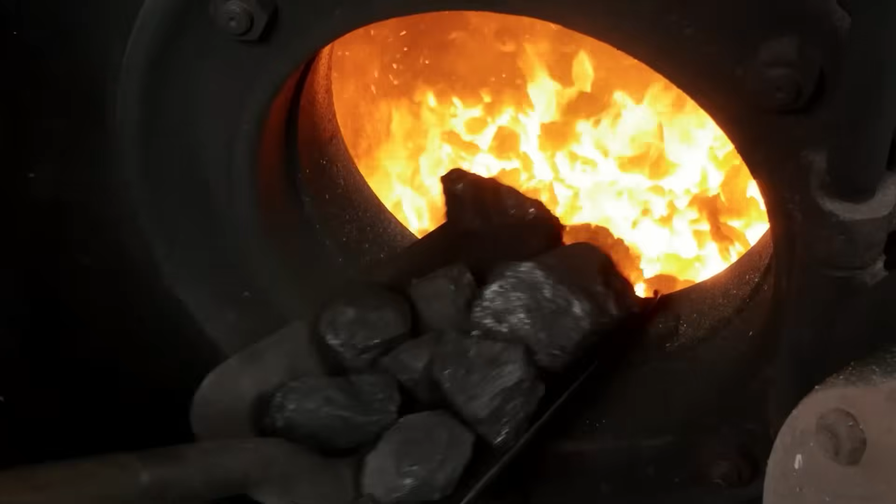Coal. The fuel that built the modern world, and the fuel that's been slowly choking it ever since. Dirty, carbon-soaked, supposedly on its way out.

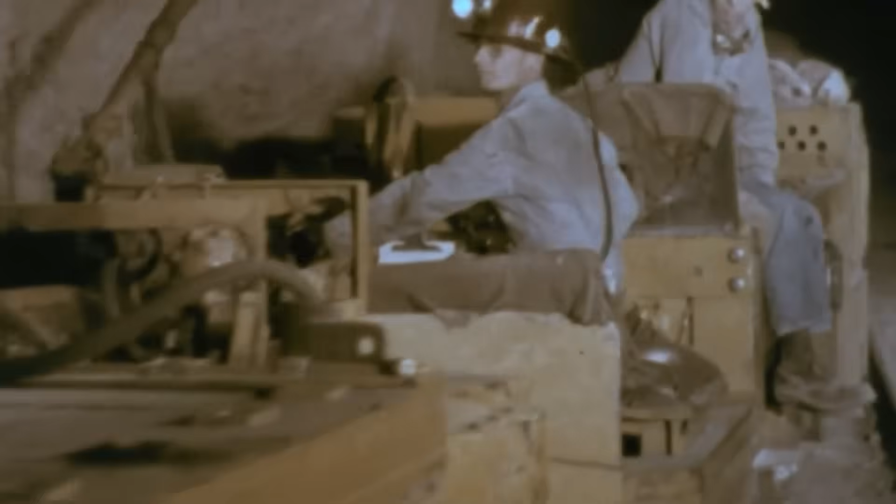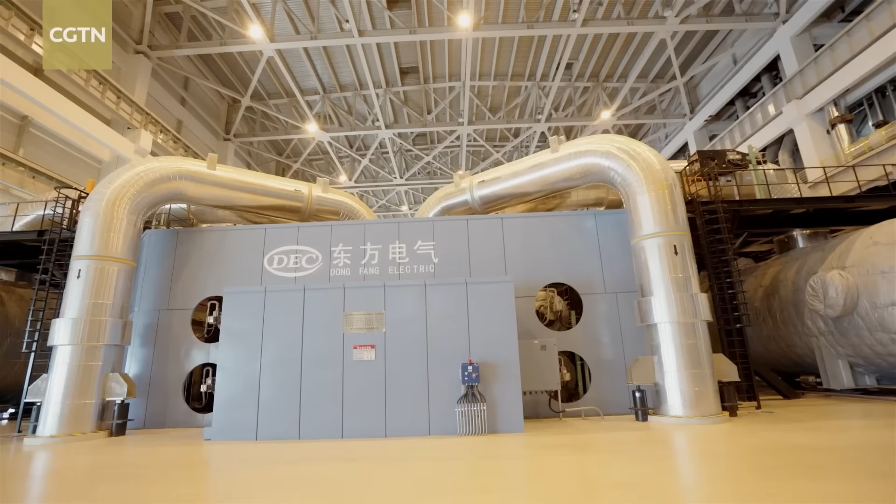So will someone please explain to me why Chinese scientists just figured out how to turn it directly into electricity, without burning a single gram of it? No fire, no smoke, no steam turbine, no combustion of any kind. Just coal going in and electricity coming out, with the only byproduct being a stream of pure CO2 so concentrated it can be captured, converted, and stored before it ever sees the atmosphere.

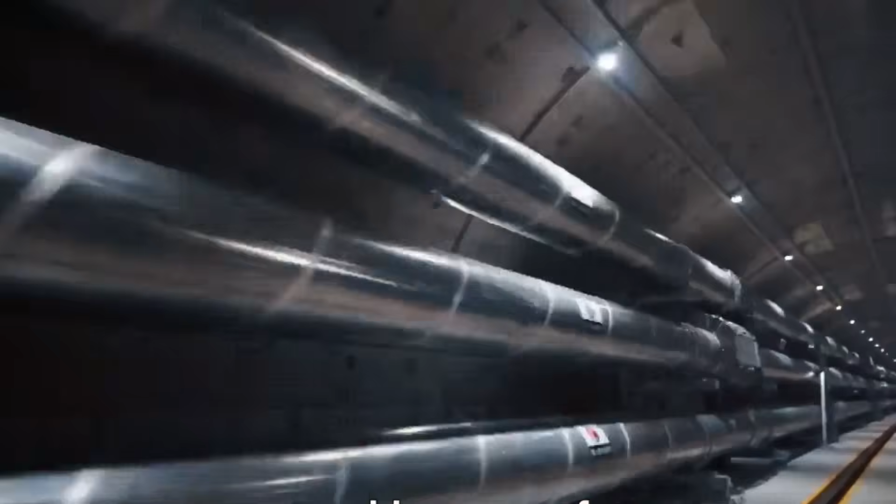The internet found this story in early May 2026 and completely lost its mind. Posts spreading in a dozen languages within 72 hours. And honestly, for once, the reaction made complete sense. Because if this works at scale, it does not just change how China powers itself. It changes the math on coal for every country on Earth that still depends on it. And right now, that is most of them.

China's energy paradox. Here is what people do not understand about China's energy situation. In 2025 alone, China built 78 gigawatts of new coal power capacity. To put that number in context, that is more than the entire electricity generating capacity of the United Kingdom, added in a single calendar year.

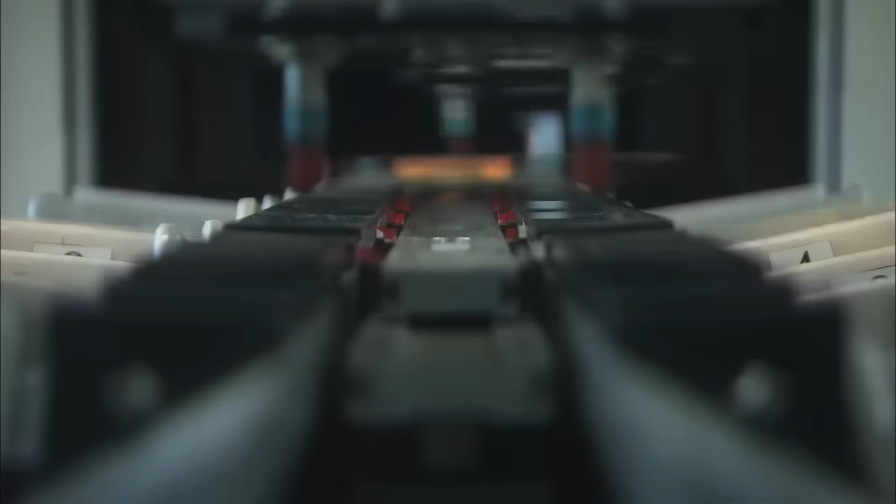At the same time, China is the world's largest builder of solar panels, wind turbines, and battery storage. Both things are true simultaneously. And that is not a contradiction. That is a survival strategy for a country of 1.4 billion people that cannot afford blackouts.

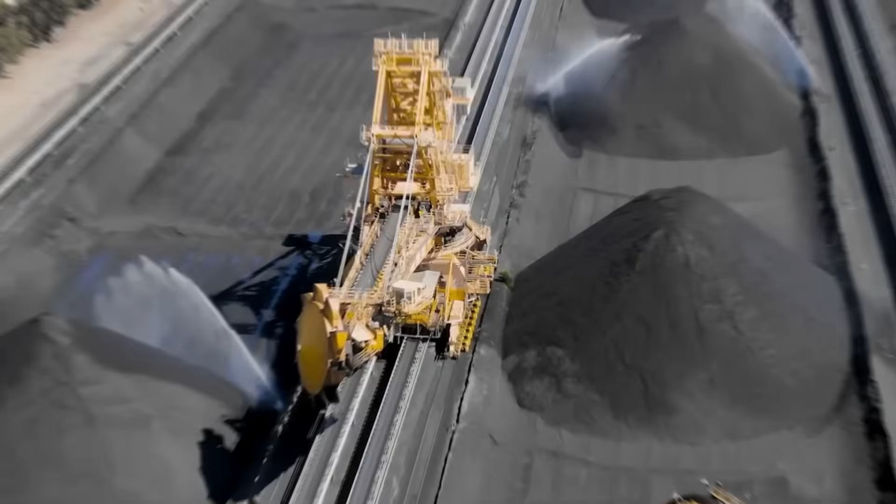But there is a problem hiding underneath the surface of all of that coal. China's shallow coal reserves, the cheap, accessible deposits near the surface, are running out. What is left is buried more than a kilometer underground, expensive to mine, dangerous to extract, increasingly uneconomical to ship across a country that size.

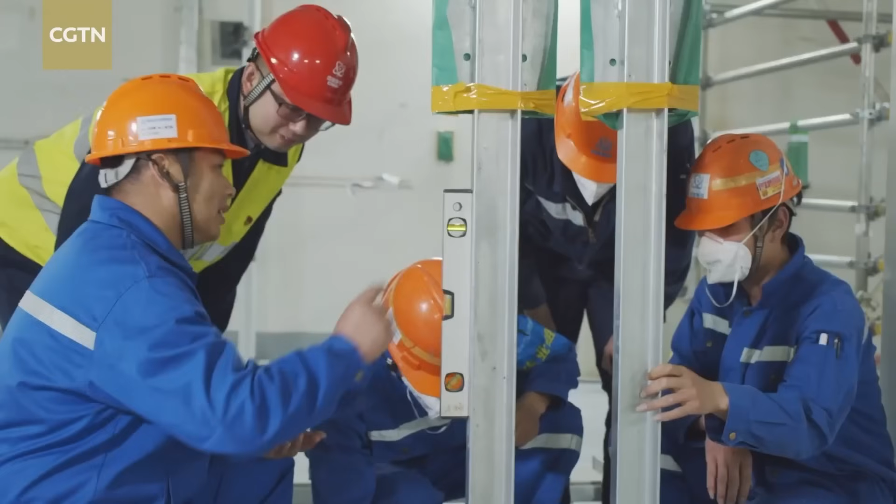So the question Chinese researchers started asking was not, how do we burn coal more cleanly? That question had been asked for decades and produced nothing worth talking about. The question they started asking was entirely different: what if burning coal was the wrong approach from the beginning?

Enter Xie Heping, academician at the Chinese Academy of Engineering, professor at Shenzhen University, and the man who decided the fundamental problem with coal was not the coal itself. It was what we had always done with it. But to understand why his team's answer is so significant, you first need to understand the wall every power plant on Earth has been running into for 200 years.

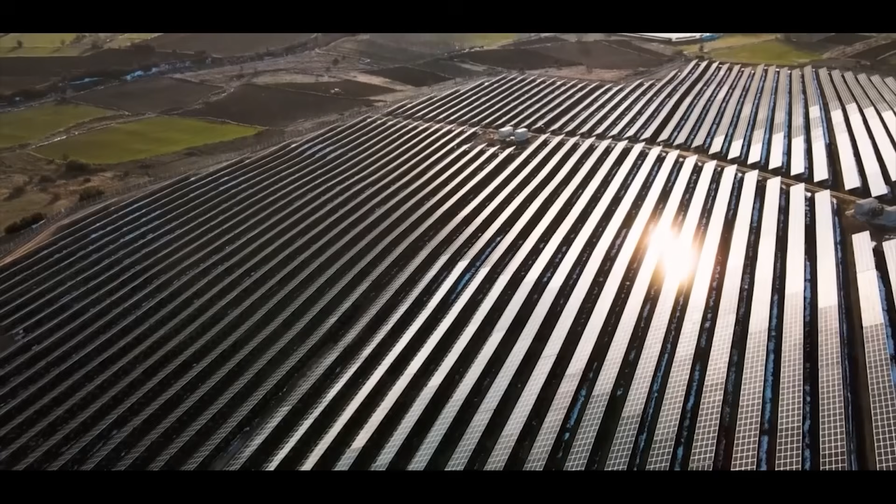So what if instead of burning coal, you just wired it directly to the grid? No fire, no steam, no turbines. And that's exactly what his team built. How the coal battery works.

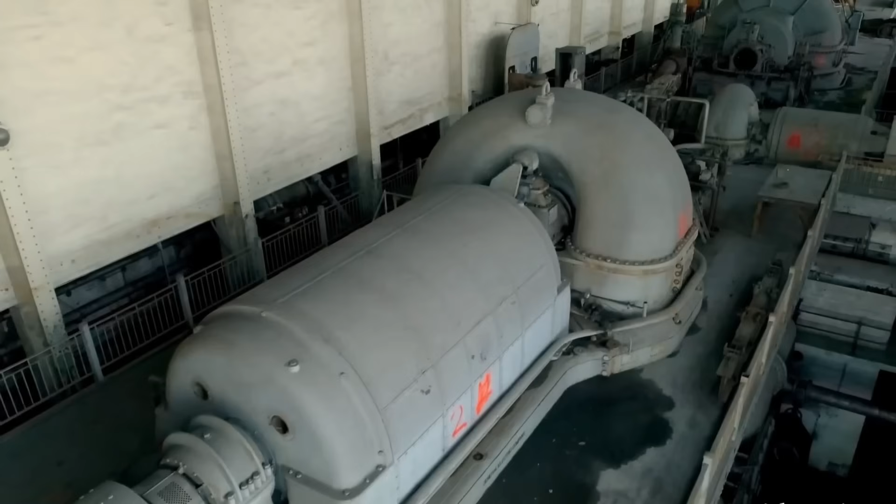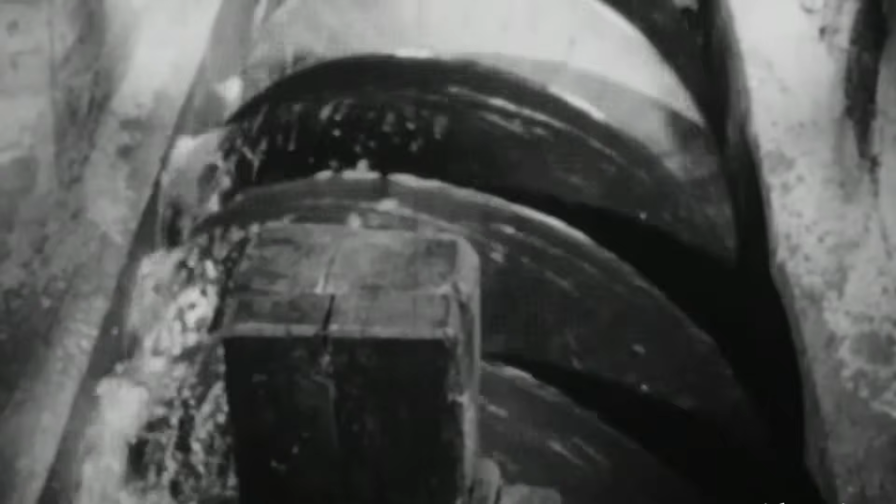Every power plant you have ever seen works the same basic way. You burn something. The heat from that combustion creates steam. The steam spins a turbine. The turbine generates electricity. Simple in principle, catastrophically wasteful in practice.

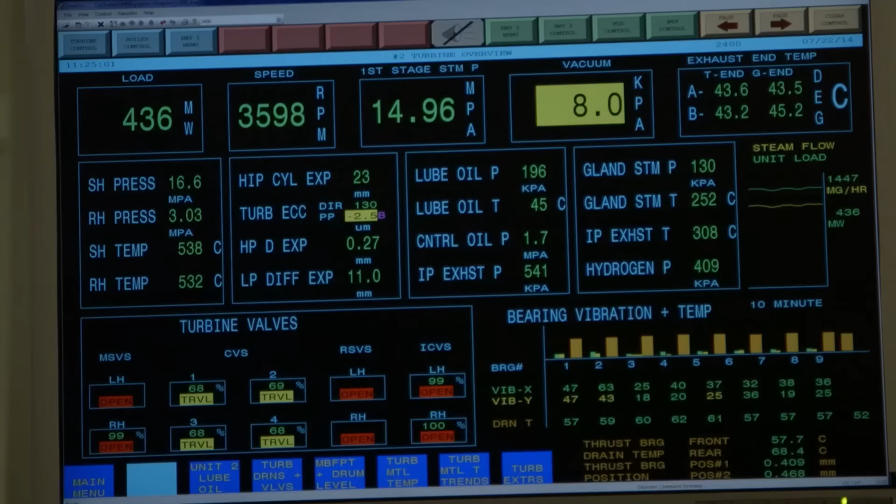Here is the problem. Every single step in that chain loses energy. By the time electricity actually reaches your wall socket, you have already thrown away more than half the energy that was locked inside the original fuel. That is not a design flaw that engineers failed to solve. It is a fundamental law of physics called the Carnot limit.

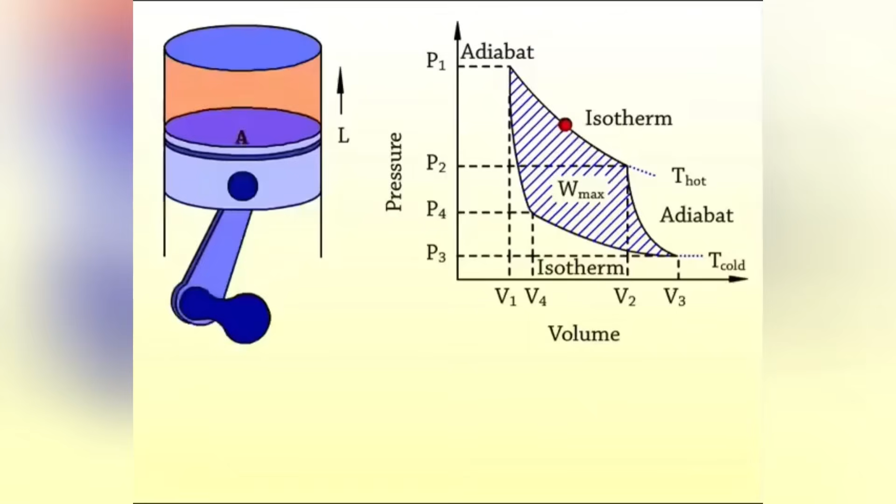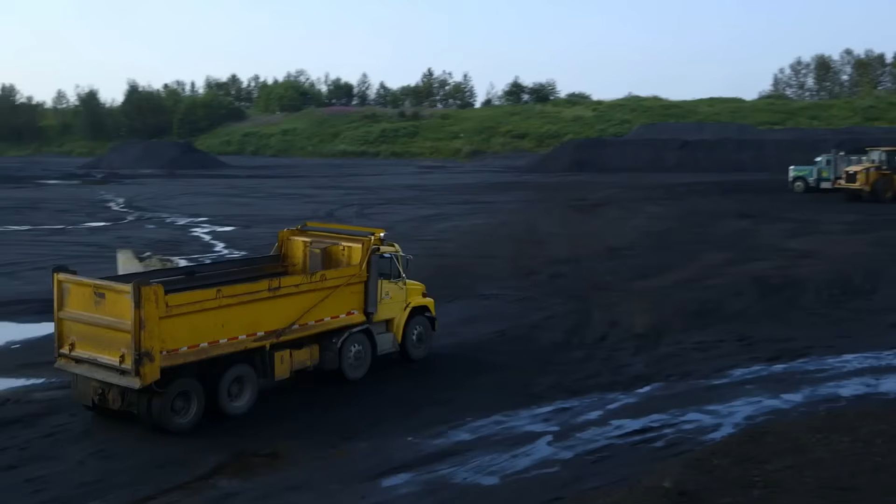The Carnot limit says this: any engine that converts heat into mechanical motion is mathematically capped by thermodynamics. The best coal plants ever built hit around 45% efficiency. The other 55% just disappears as heat, forever, no matter how clever the engineering gets. You cannot engineer your way out of a law of physics.

Xie Heping's team did not try to beat the Carnot limit. They removed it from the equation entirely. The technology they built is called the Zero Carbon Emission Direct Coal Fuel Cell, the ZCDCFC. Think of it as a battery where coal is the fuel. And once you understand how it actually works, the efficiency numbers stop seeming impossible and start seeming inevitable.

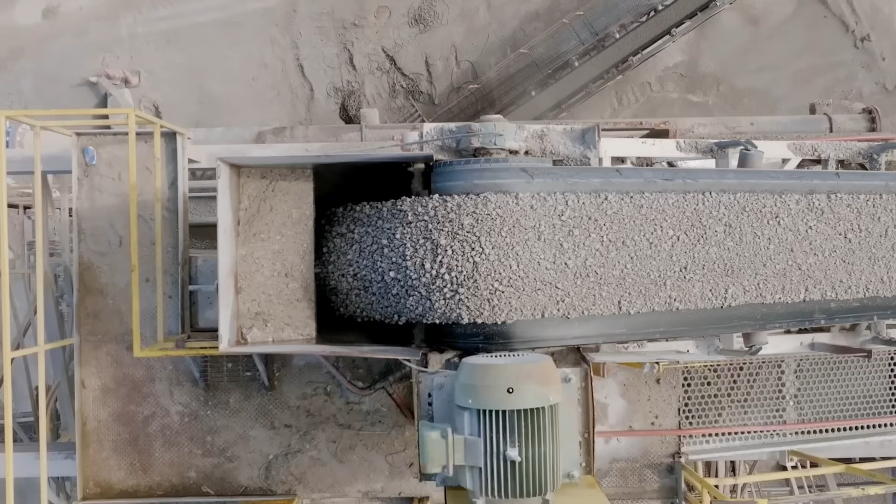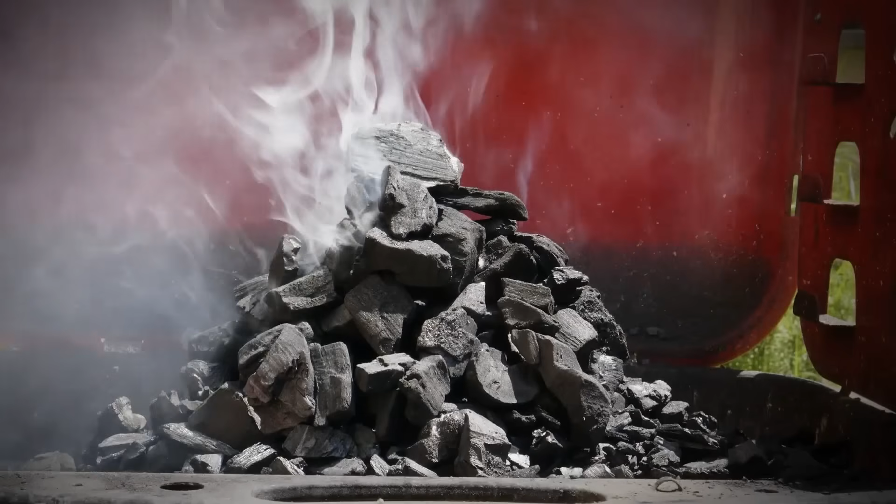First, the coal gets pulverized into an ultrafine powder, particles smaller than 10 micrometers, thinner than a human hair. Then it gets dried and chemically cleaned to remove sulfur and ash. This matters because what happens next is extremely sensitive chemistry.

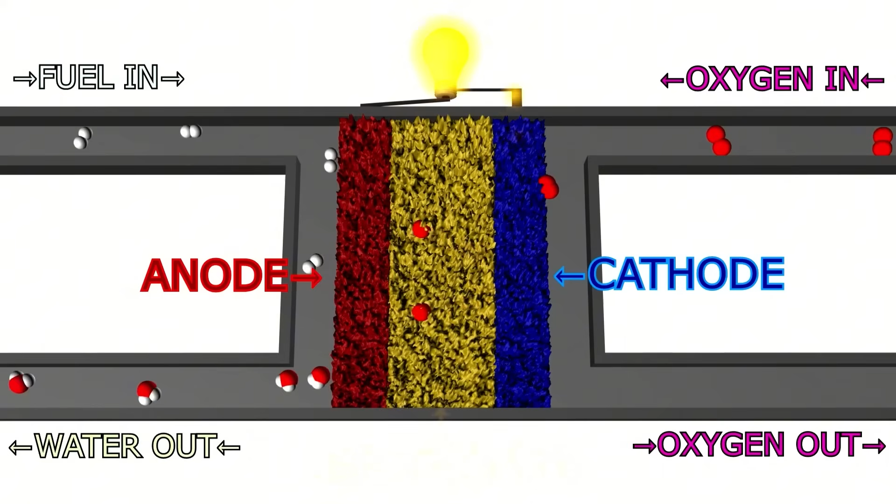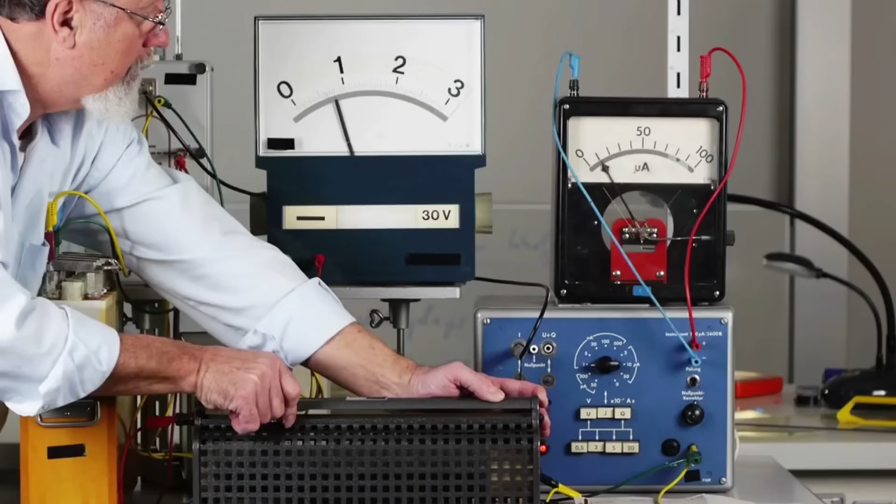That purified coal powder gets fed into the anode chamber of a fuel cell. On the other side is the cathode, where oxygen enters. Separating them is a ceramic membrane that conducts oxygen ions at high temperature. At somewhere between 600 and 900 degrees Celsius, the oxygen ions migrate through that membrane toward the carbon. And here is where the physics takes a completely different turn than every power plant ever built. When the oxygen ions meet the carbon atoms, there is no combustion, no fire, no heat burst.

Instead, you get a direct electrochemical reaction. Carbon and oxygen combine, and the energy that releases does not escape as heat into the atmosphere. It flows out as electrons, as electricity, directly, without any intermediate step.

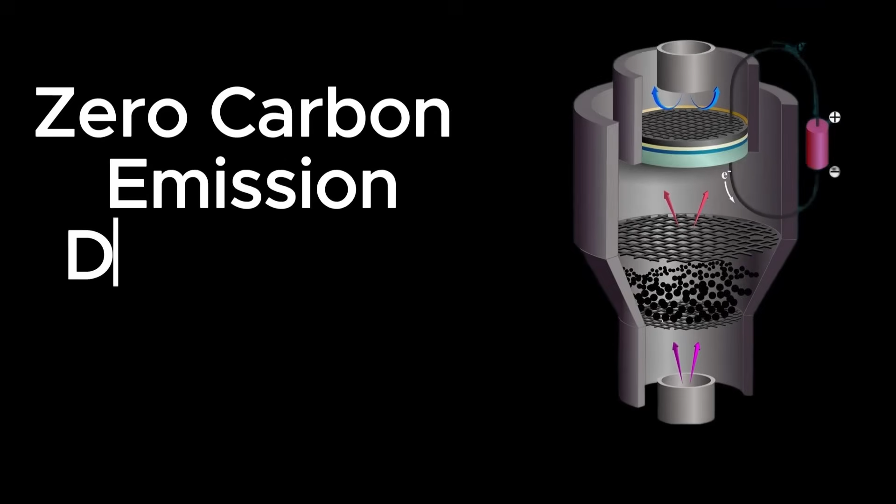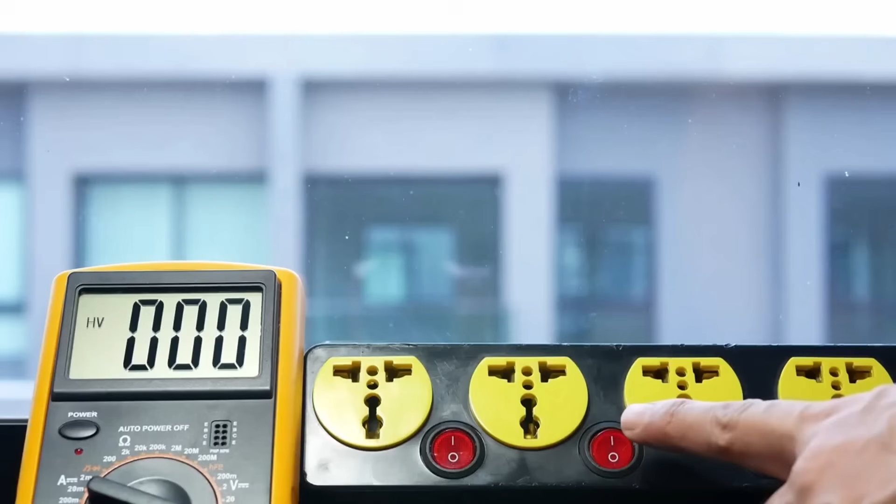Traditional coal plants run at 33 to 45% efficiency. The ZCD-CFC theoretical ceiling is 90%. Real-world practical efficiency demonstrated in the lab is 55 to 60%, even accounting for all the energy spent grinding, drying, and maintaining operating temperature.

It is still the most efficient coal power technology ever demonstrated anywhere. But efficiency is only half of this story. The half that actually broke the internet is what happens to the carbon. Because there is no smokestack, there is just a pipe, with pure CO2 coming out of it. And the team already figured out 3 different things to do with that too.

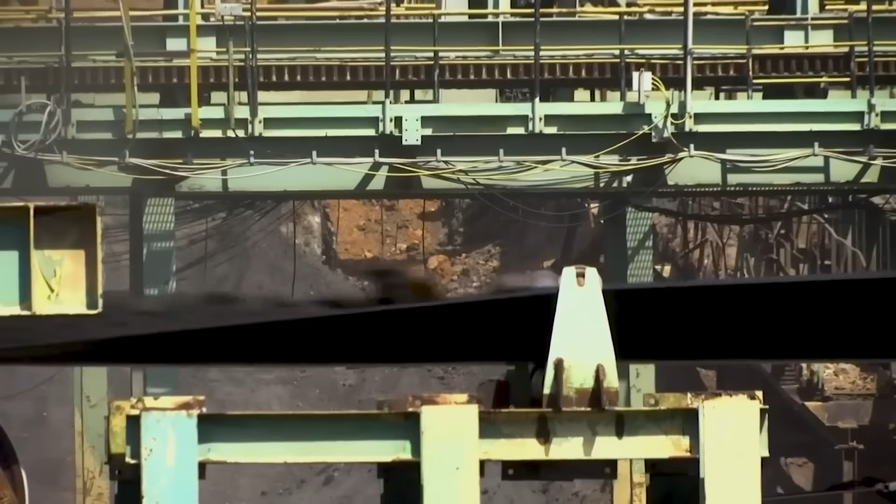The zero carbon claim and the underground power plant. In a normal coal plant, the CO2 that comes out is mixed with nitrogen, steam, sulfur dioxide, and particulates. It is a mess. Separating usable CO2 from that mixture costs between $50 and $100 per ton.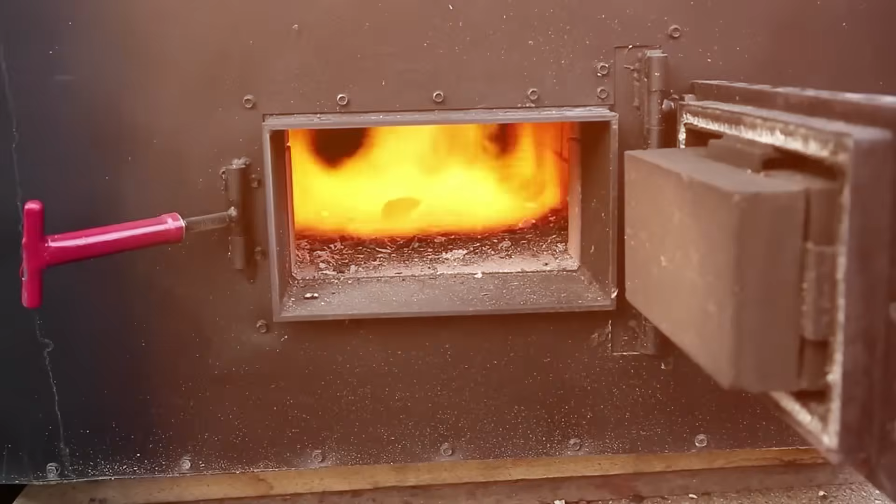Convert the CO2 to syngas through a process called dry reforming. Syngas is a building block for synthetic fuels, plastics, and fertilizers. Your waste carbon becomes an industrial feedstock.

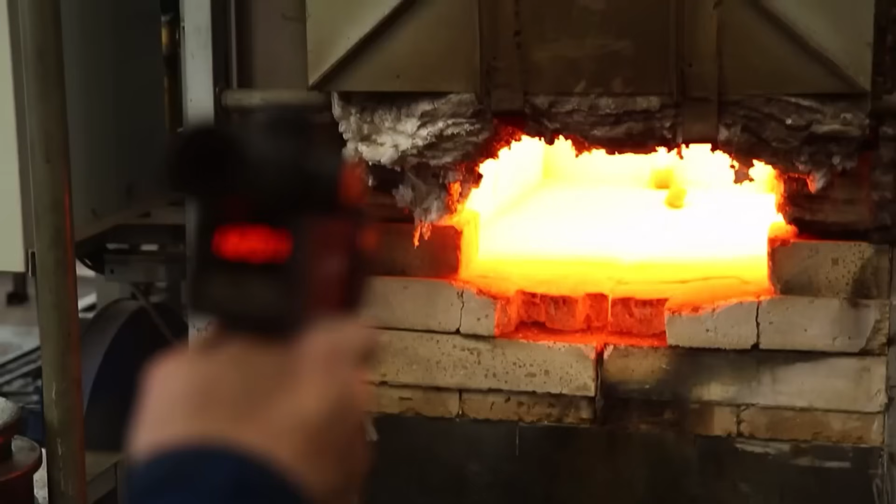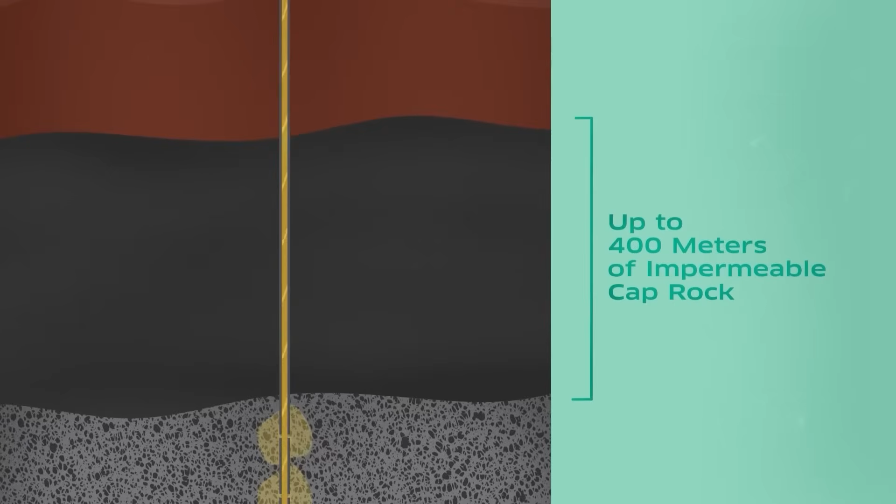Mineralize it. React it with mineral compounds to form solid sodium bicarbonate, chemically locked into a stable solid permanently. Inject it back underground into depleted coal seams, where it enhances recovery of natural gas, while keeping the carbon stored below the surface. In simple terms, the carbon becomes manageable because it was never allowed to mix with open air in the first place. In all 3 cases, the carbon never reaches the atmosphere.

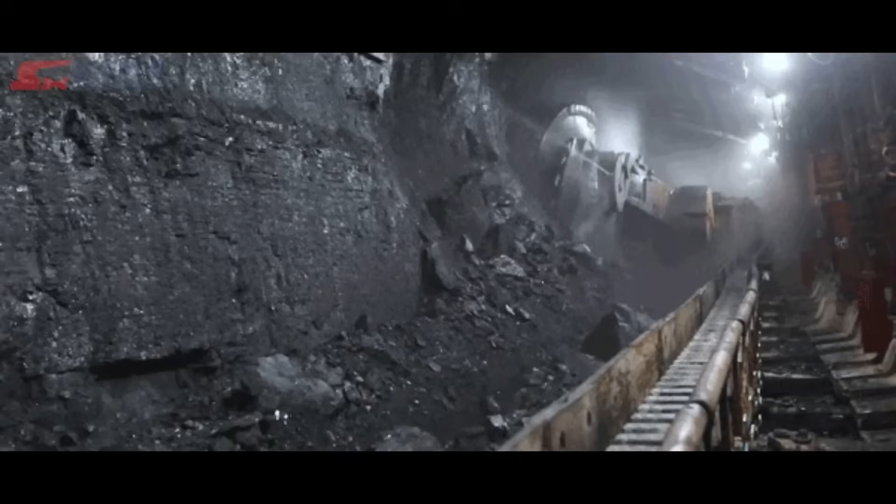That is not a marketing claim. That is a closed loop built into the chemistry of the device itself. Now, here is the part that goes from impressive science to genuinely reality bending. The team's most ambitious proposal is not to build the fuel cells at the surface at all. It is to put them underground, right at the coal seam.

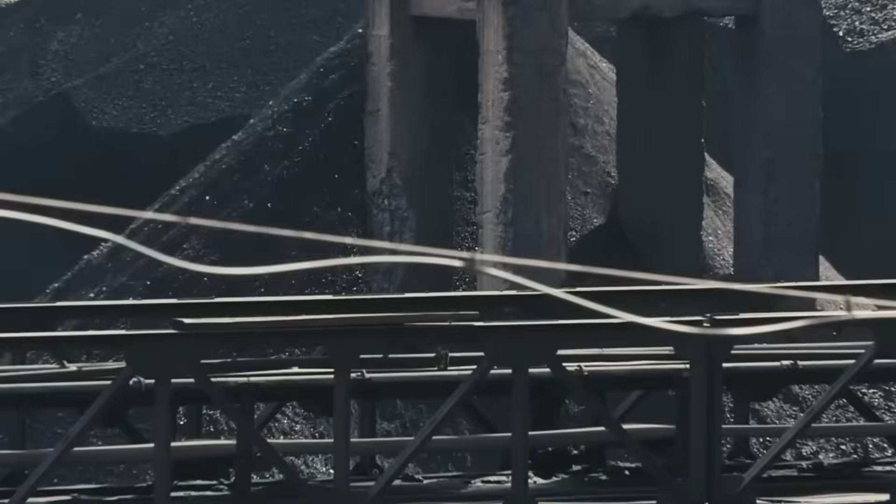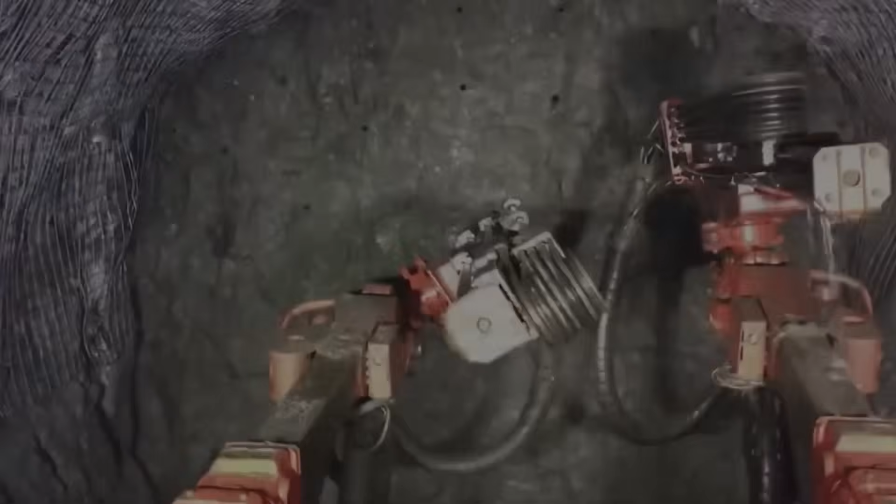Instead of mining the coal, transporting it across the country, and burning it in a massive industrial complex, you drill a borehole. You lower modular fuel cell stacks down to the coal deposit, 1 to 2 kilometers underground. You convert the coal into electricity right there where it sits, and the only thing that travels back up to the surface is a cable carrying electricity.

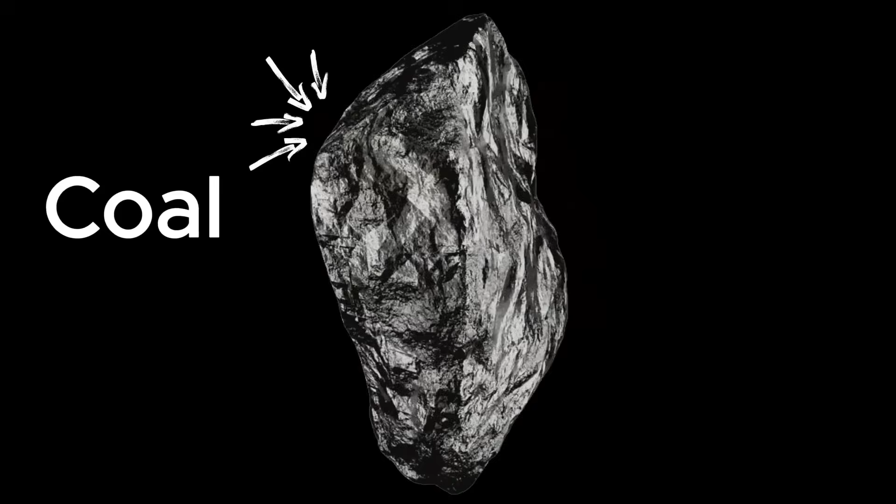The CO2 stays underground. The ash stays contained in the seam. The surface footprint is a few drilling pads, no coal trains, no ash ponds, no cooling towers, no visible industrial footprint at all. That is the proposal: an underground power plant with essentially no surface infrastructure, running on a coal seam that would otherwise be too deep and too expensive to mine.

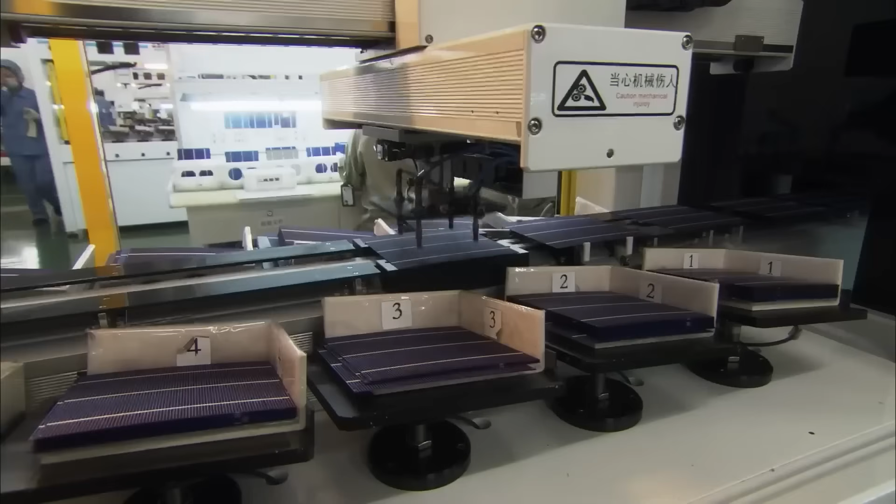Now, before you start recalculating your entire mental model of how energy works, it's worth being honest about where this technology actually stands, because this is where the story gets more complicated and, in some ways, more interesting. Reality check: the chemistry is real.

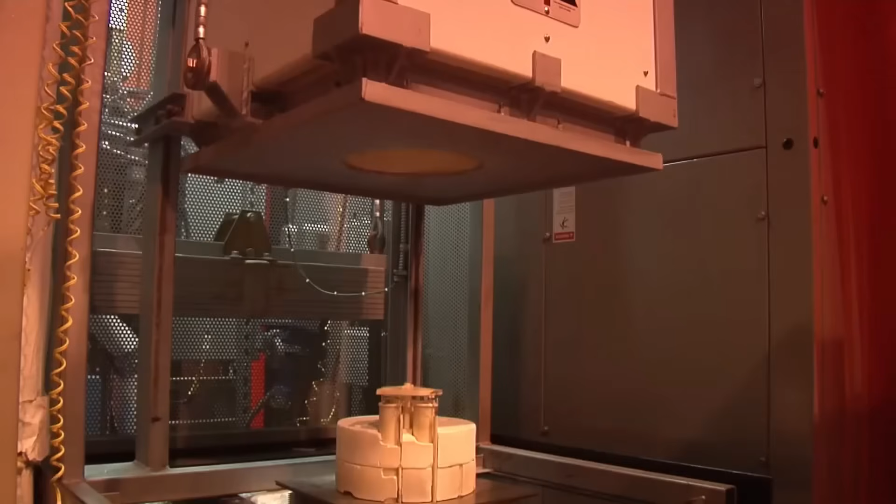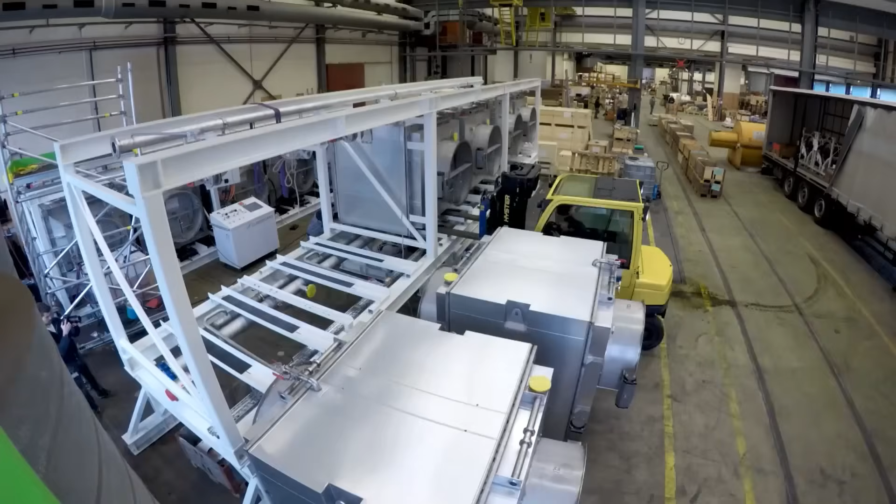Electrochemical coal oxidation has been demonstrated in research labs since the early 2000s. The efficiency gains are real. Bypassing the Carnot limit through electrochemistry is not theoretical, it is proven physics. The pure CO2 capture is real. It is an inherent feature of the sealed cell design, not something added on top.

What is not proven yet is everything that happens between a working laboratory cell and a commercial power plant. Long-term durability is an open question. Can ceramic cells of this type run for 10,000 hours or more without degrading?

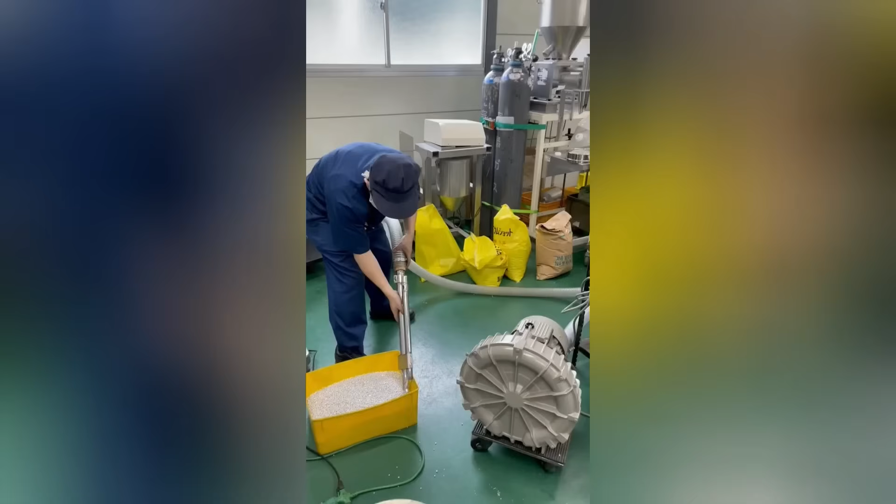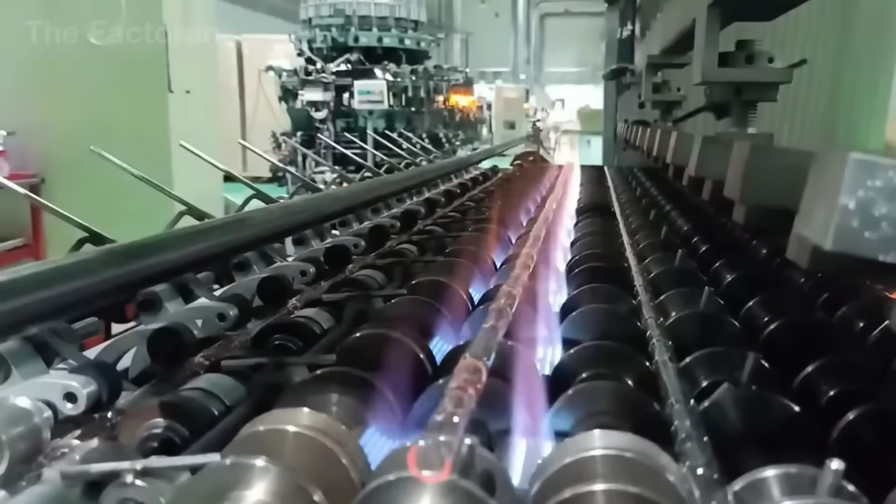The honest answer right now is that researchers are working on it. Continuous coal feeding at scale is an engineering nightmare. Feeding a fine powder into a sealed high-temperature system without interruption, without blockages, without pressure fluctuations, is not a solved problem. The advanced ceramics and precision materials involved are expensive. Experts looking at the commercial pathway are realistic about the timeline, post-2045 at the earliest for meaningful scale deployment.

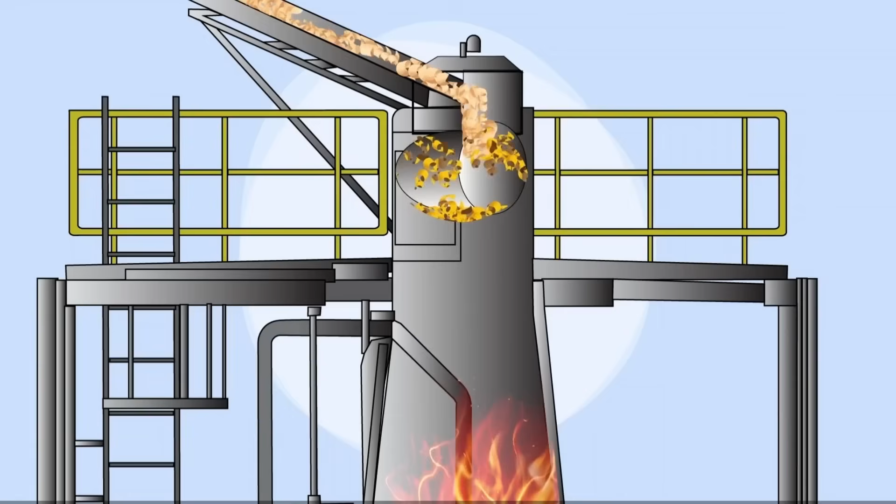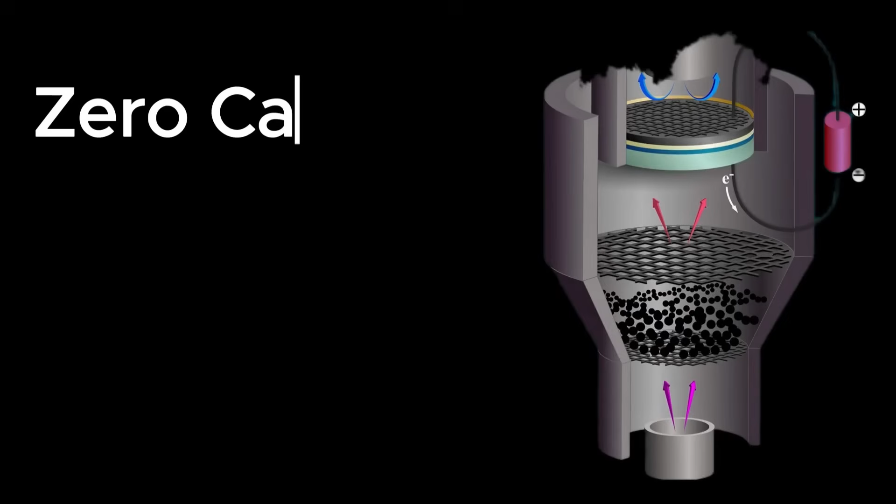There is one more thing worth saying clearly. If the captured CO2 eventually gets converted to syngas, and that syngas gets burned somewhere down the line, you have delayed the emission, not eliminated it. The zero carbon claim depends entirely on what happens to the carbon after capture. The science gives you the option to close the loop. Whether that option gets taken depends on economics and policy.

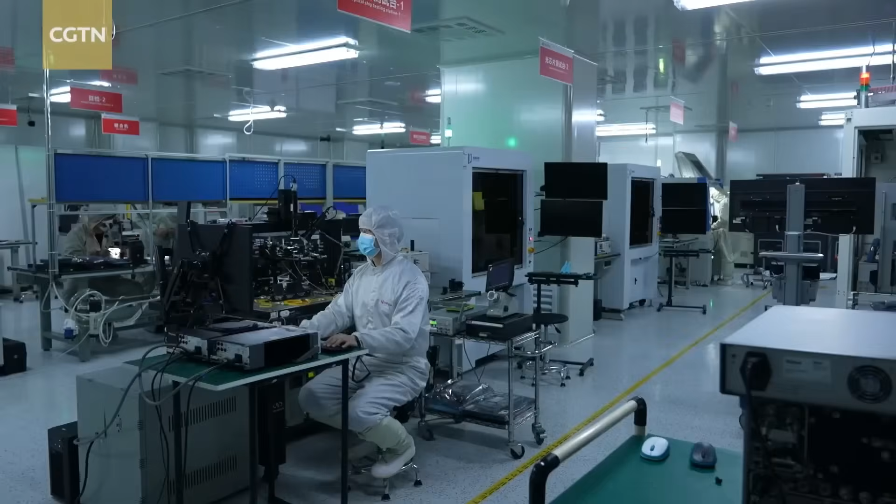This is not clean coal in the sense that politicians used that phrase for two decades as a talking point to avoid real decisions. It is not a scam, but it is also not a switch you flip. It is a 20-year research and engineering project that just published a very significant paper. That distinction matters. Why this matters for the whole world.

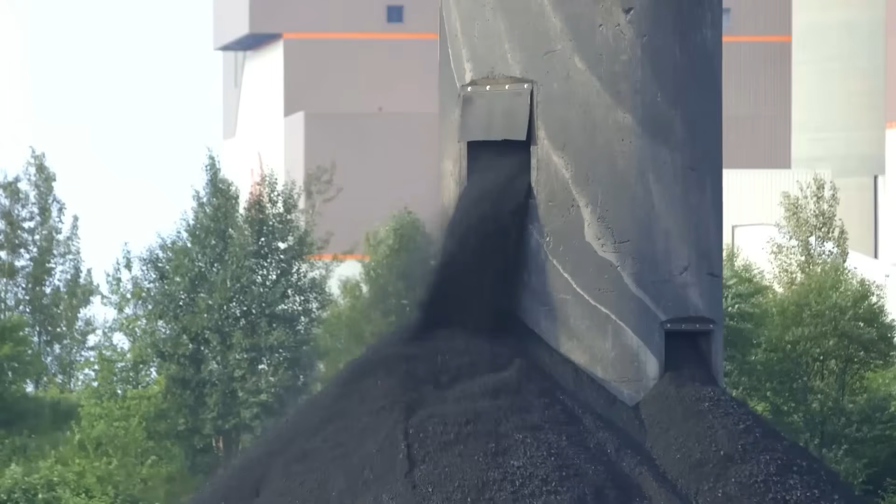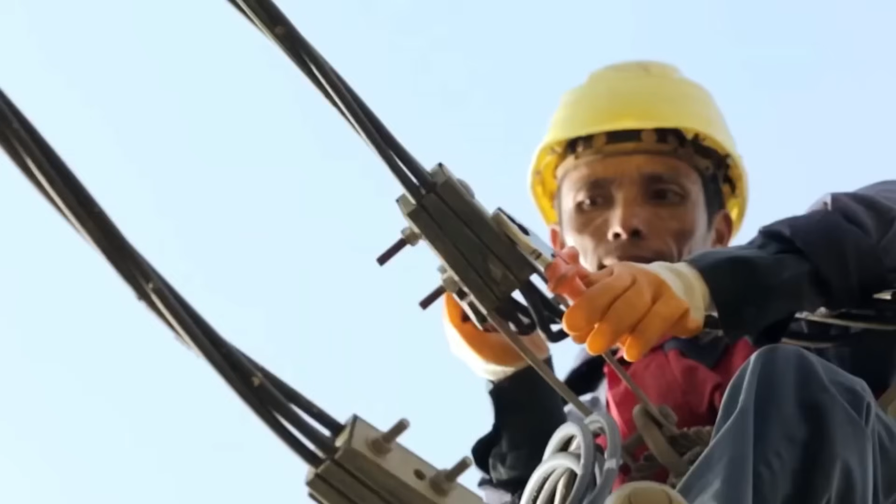What also matters is what this technology could mean for the countries that need it most. Because this story is not really just about China. Coal currently generates about 35% of the world's electricity. It is not disappearing in a decade. Not in India, where coal provides more than 70% of electricity. Not in Southeast Asia, where energy demand is growing faster than any renewable build-out can currently match. Not in parts of Africa that are still trying to reach reliable electricity access at all.

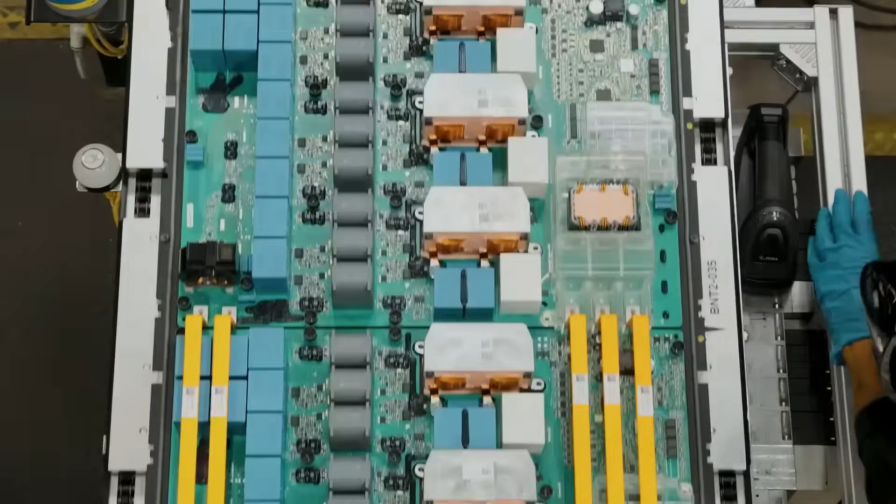The argument against fast renewable transitions in developing nations has always come down to the same two things: reliability and cost. Solar and wind are intermittent. Battery storage is expensive. Coal is cheap, domestic, and works when the sun does not shine. That argument has been winning in a lot of places, and the climate consequences of it winning are real.

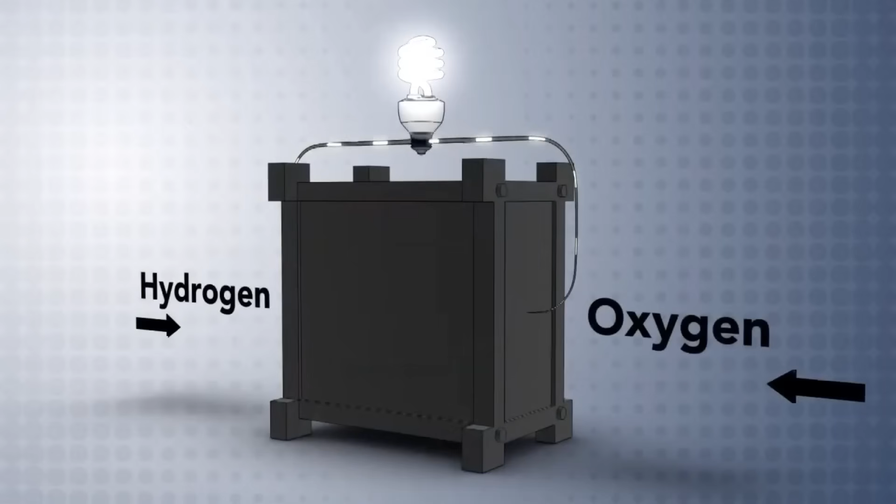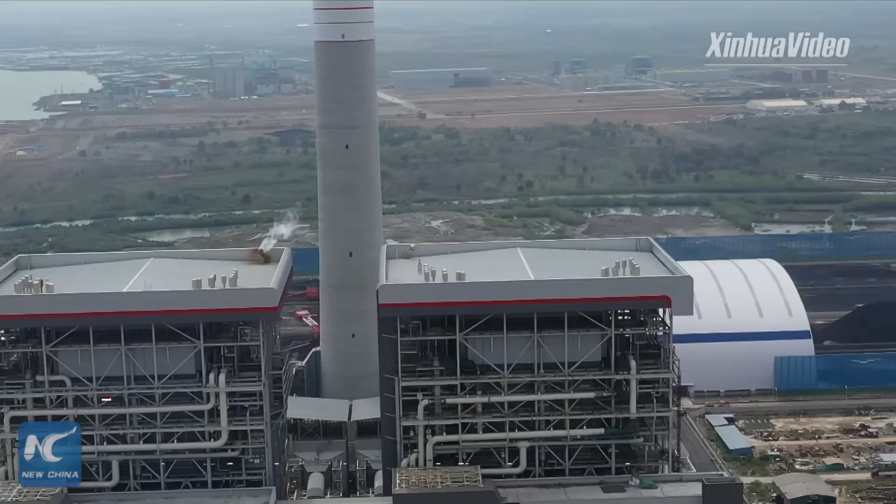If the ZCDCFC delivers on its promise, it changes that calculation. You get the reliability of coal, efficiency that beats the best natural gas plants, and emissions that can be captured at the source. For countries sitting on massive domestic coal reserves, this is not just an energy story. It is an economic argument for a different kind of transition, one that does not require abandoning your most abundant resource before you have a viable replacement.

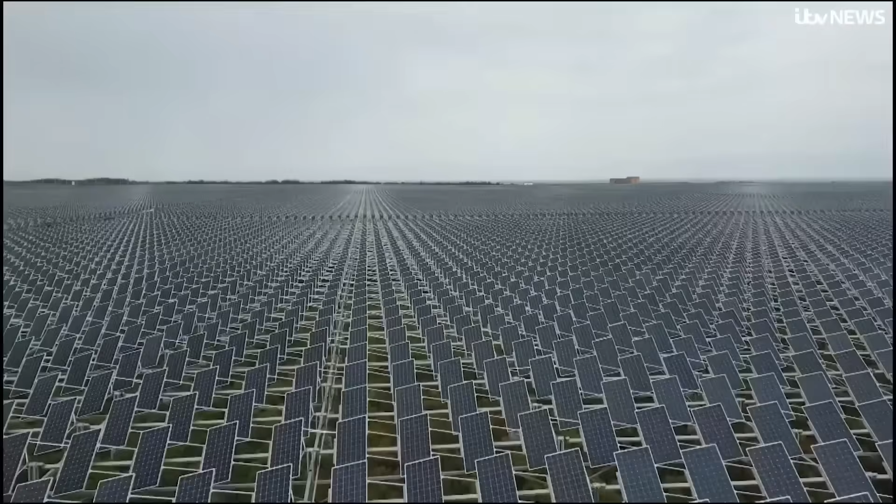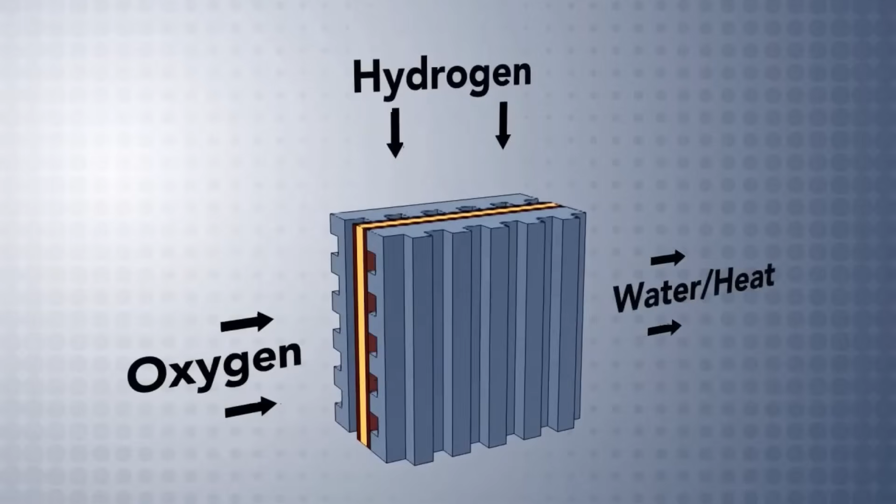And then there is the geopolitical layer, which is worth sitting with for a moment. China already controls roughly 80% of the global solar panel supply chain. They dominate battery manufacturing. They lead in wind turbine production. If ZCDCFC technology matures and scales, they would not just lead the clean energy transition, they would lead the fossil fuel transition too. They would become the country that sells the technology, allowing coal-dependent nations to decarbonize while keeping their domestic energy resources. That is not an energy strategy. That is a foreign policy strategy.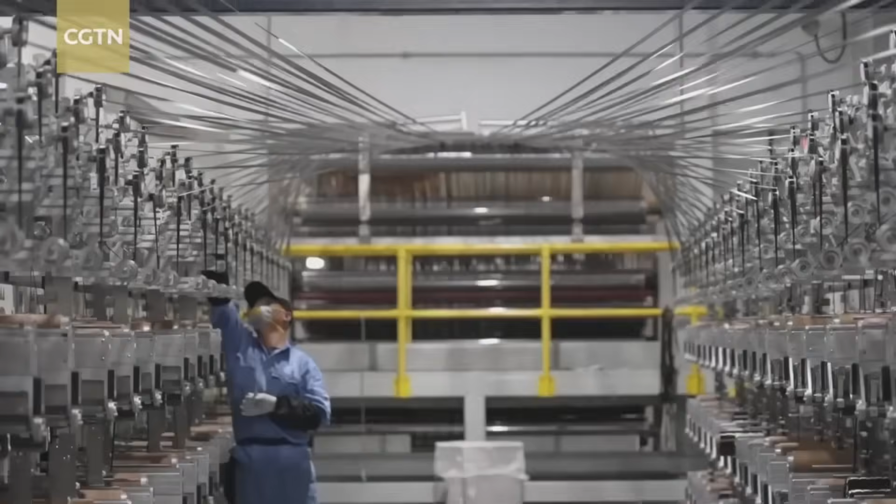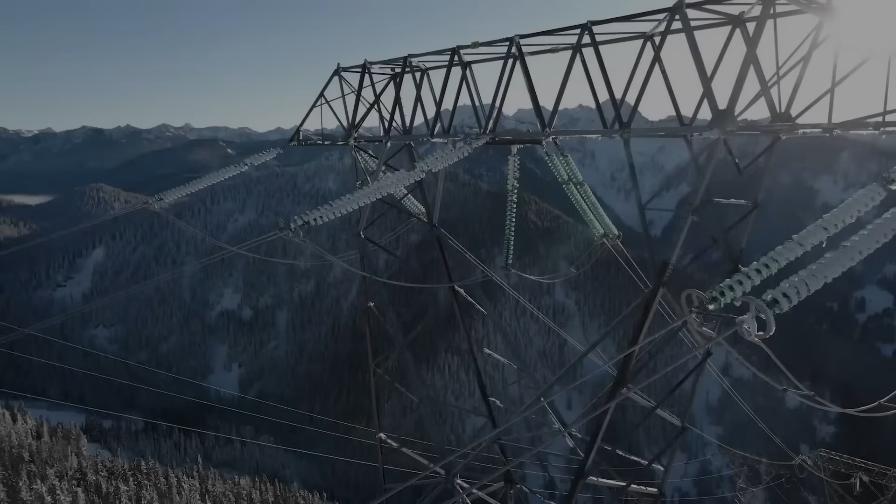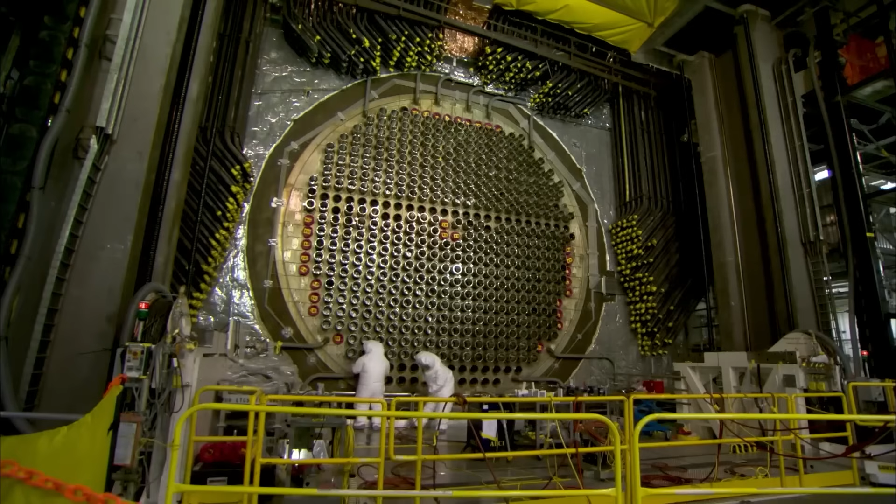And it is being built right now in a laboratory at Shenzhen University, inside a sealed ceramic cell the size of a research bench. The team is targeting a commercial pilot phase sometime after 2045. In the long history of energy transitions, that is not a distant abstraction. Steam engines took a century to be replaced. Nuclear power was conceived in the 1930s and still only generates about 10% of global electricity today. Energy transitions move in decades, and the decisions that shape them get made in laboratories long before any investor writes a check or any government signs a mandate.

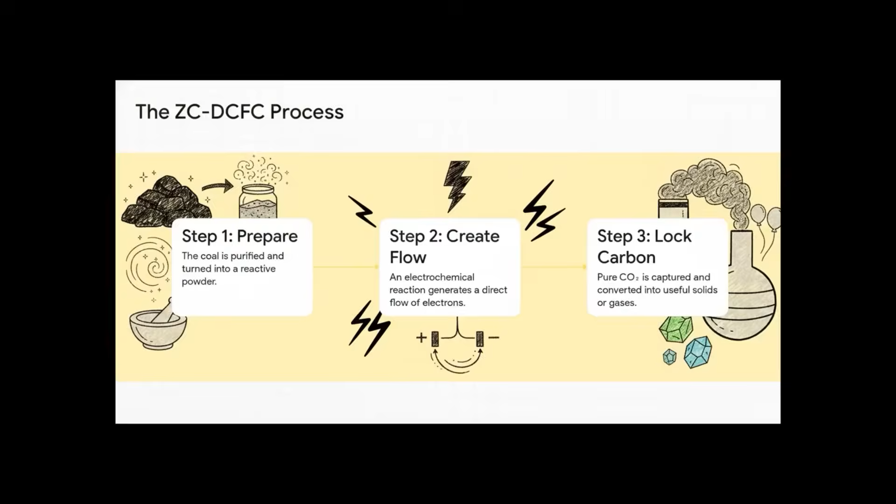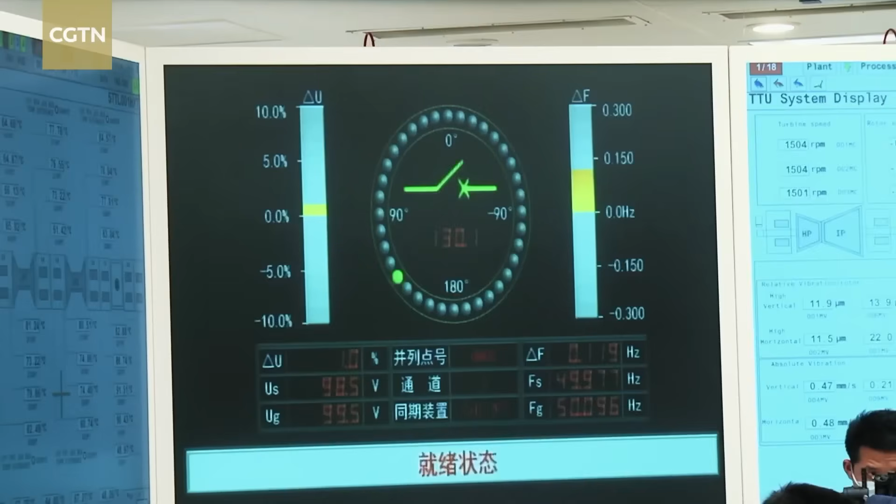The ZC-DCFC is not the end of coal. It might be coal's second chapter, as something that looks a lot less like a fossil fuel and a lot more like an electrochemical feedstock, something you feed into a device underground and pull electricity out of while the carbon stays locked below where it came from. If that sounds strange, keep this in mind: the physics is not broken, the chemistry is not speculative. What is changing is the assumption we always carried that coal had to be burned to be useful. That assumption is 200 years old, and a research team in Shenzhen just quietly finished writing the argument against it.